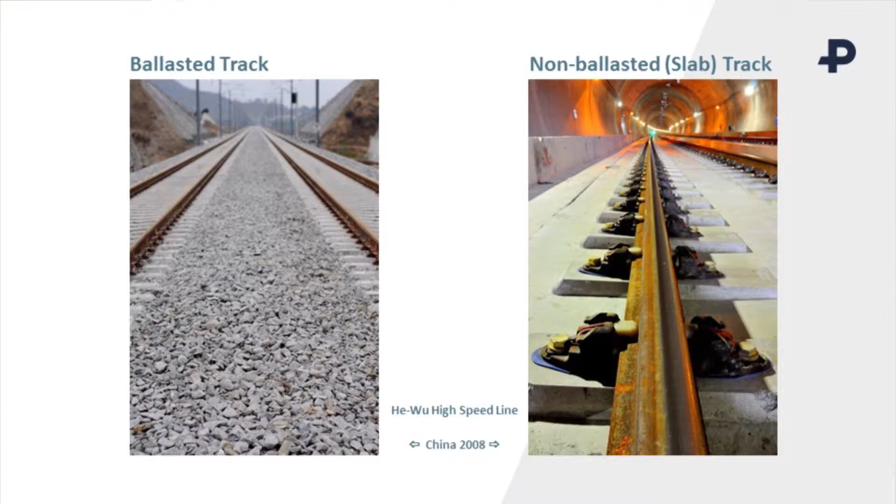There's a couple of pictures here, one of ballasted track, one of non-ballasted track, just by way of introduction. Those pictures are actually taken only a few hundred metres apart, and they show that you can use either on the same project. The particular point I wanted to make here wasn't why you'd choose one or the other, though you might get a hint from the fact that one's in a tunnel and one isn't. But the thing is, if you take away the ballast from the system, you lose a number of aspects of the performance of the system.

One is a degree of resilience, which the ballast provides. Another one is some drainage. And the third one would be the capacity to make adjustments to the line and level by tamping the track.

So the way that you overcome those losses, at least one way of doing that, is by providing that capability in the fastening system, which tends to mean you have a slightly more complicated fastening system than on ballasted track, typically a baseplate arrangement. So if you were to look on our website, a bit of advertising there, you'd find that we supply quite a few different designs of baseplate.

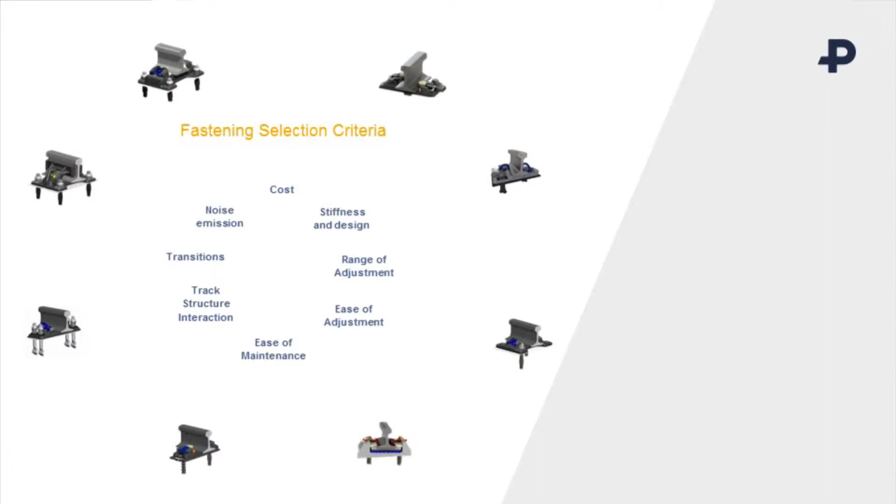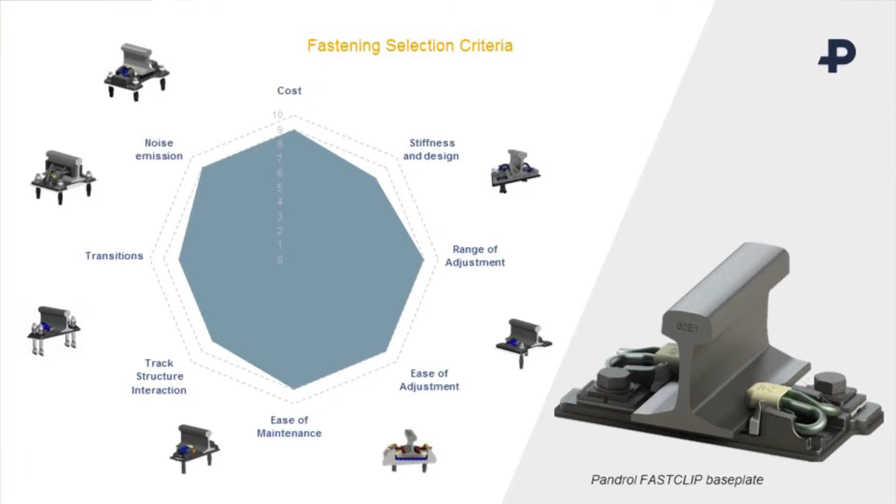So why would you choose one over the other? Probably a good way of looking at this is to look at the kind of things that are important to you as a user, or our customers. These are the kind of things we get asked questions about. So what you might then do is look at your own particular project and assess how any given baseplate performs in relation to those different criteria.

What I particularly want to do, though, is focus on just one design of baseplate, because it's a good all-rounder. It actually performs quite well in relation to all those aspects, so it provides quite a good framework for talking about all of them. So what I basically want to do is work my way through that list and talk a little bit about each aspect of the performance of the baseplate. And I'll either reach the end, or I'll get shown the red card if I carry on too long and we won't reach the end. But hopefully we'll get there.

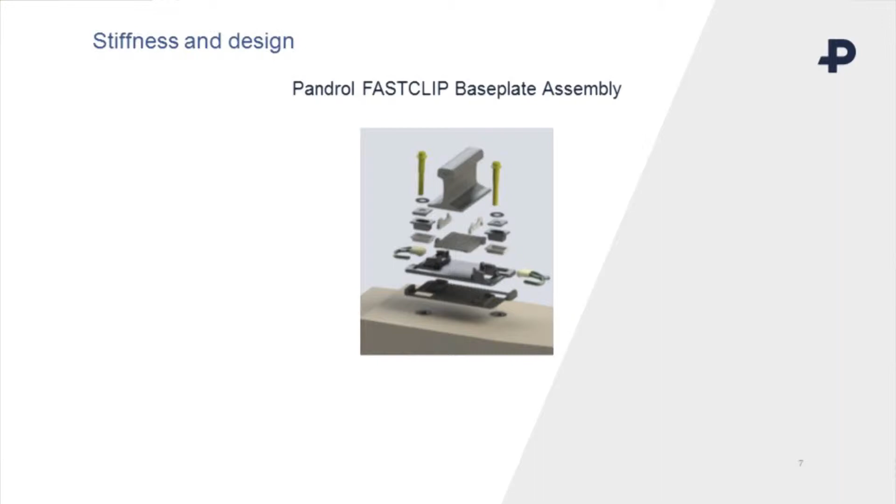So if I start off by talking about the stiffness and design, a baseplate like this is clearly made up of a large number of components, but from the end user point of view, you don't really have to concern yourself with that, because most of it is pre-assembled into one unit with some anchor bolts to fix it down. So you can treat it as one unit.

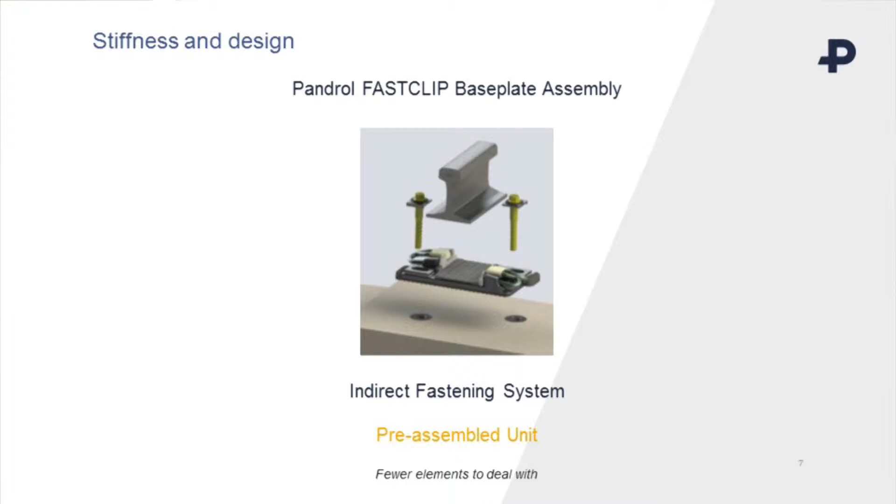From the technical point of view, that's defined as an indirect fastening system. The reason for that is that the means of fixing the rail to the baseplate, and the baseplate to the slab, are separate and independent from each other. So there are two different mechanisms there. Other aspects of this kind of design: the rail is mechanically and electrically isolated from the baseplate, and the baseplate is the same to the slab.

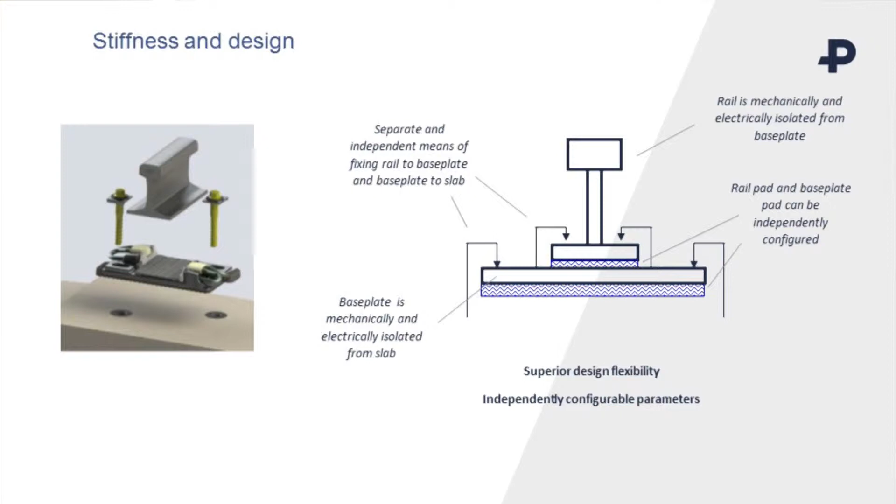And then you've got two pads in series which can be independently configured. So overall, that gives you quite a lot of flexibility in exactly how you configure this kind of system to meet any given requirement. So, you have to watch this quite carefully and quickly, but these are the key aspects of the system: the base plate and the anchor, the fastening of the rail to the base plate, and then you've got two pads in series. So that's what we're looking at.

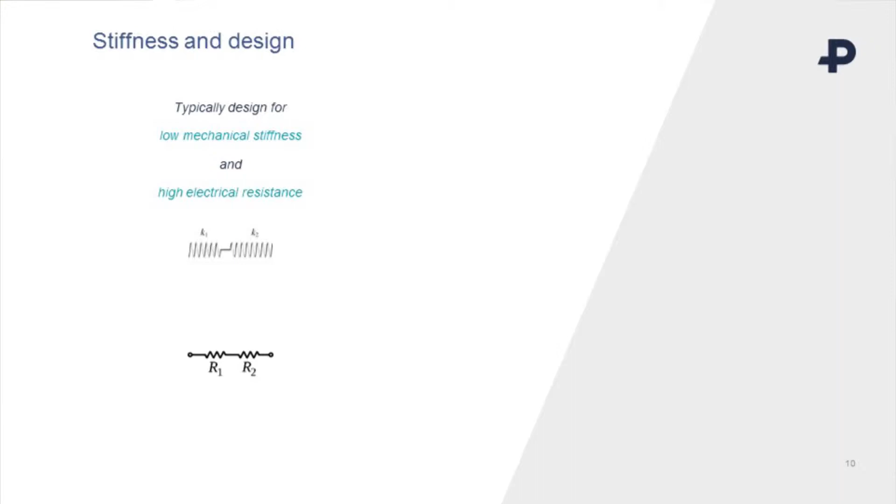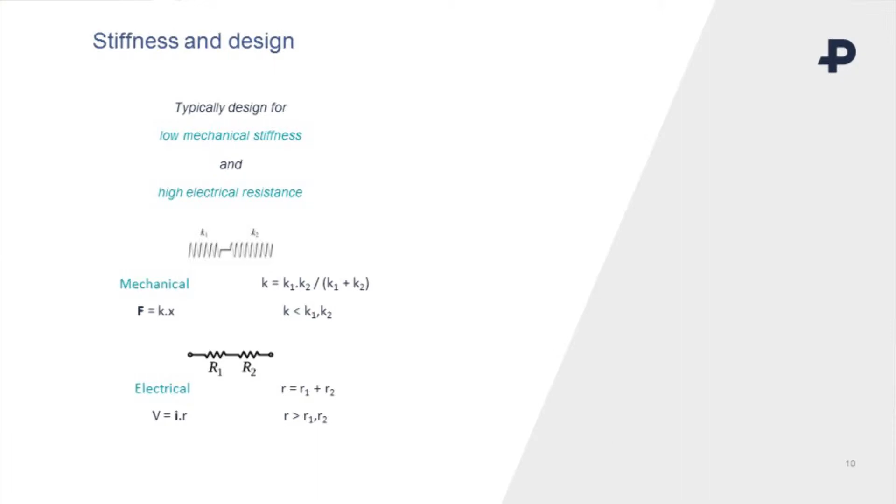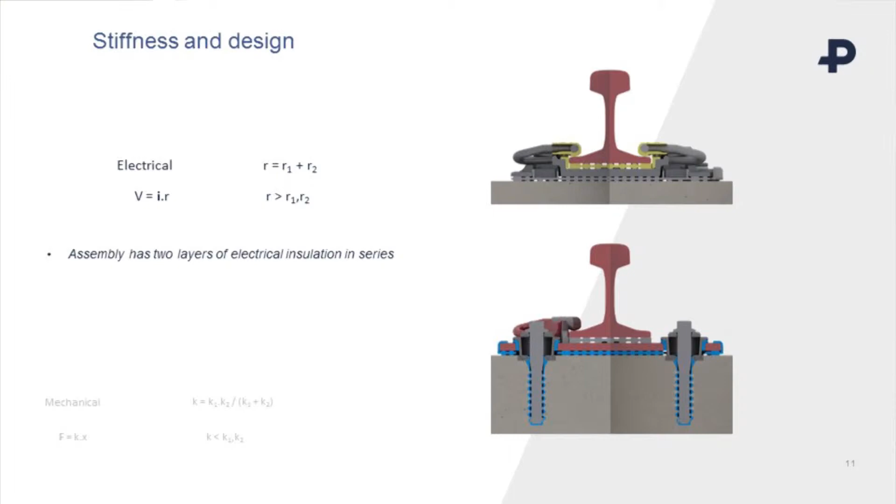Now, typically, you'd be looking to design for low mechanical stiffness and high electrical resistance, with two elements in series - looks kind of similar, and in fact the equations that govern those systems are pretty similar. But the thing to notice here is if you apply a force to the rail, it will be transmitted through the base plate into the slab, so it's the force that goes through the whole system. If you apply an electromotive force, i.e. a voltage, to the rail, it's actually the current that goes through the whole system. So if you look at the equations for those two things in series, quite neatly, two springs in series give you a lower mechanical stiffness than either one, whereas two resistors in series give you a higher resistance than either one, which is what you really want to achieve.

So if we look at the simple case of electrical resistance, you've got two layers, one on top of the other.

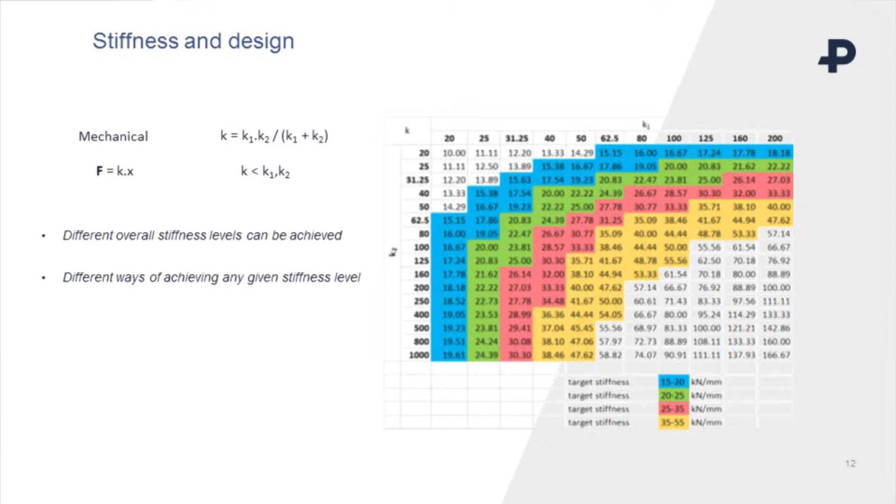You've got two levels of resistance for current to get through. If you look at the mechanical aspect, the key thing to notice is that you can achieve all sorts of different levels of stiffness by choosing appropriate pads. As represented by the different colours, you can choose different overall stiffness levels. But also for any given stiffness level, you can achieve that in many different ways by different combinations of pads. That's something I'll come back to later because it's a useful aspect of the system.

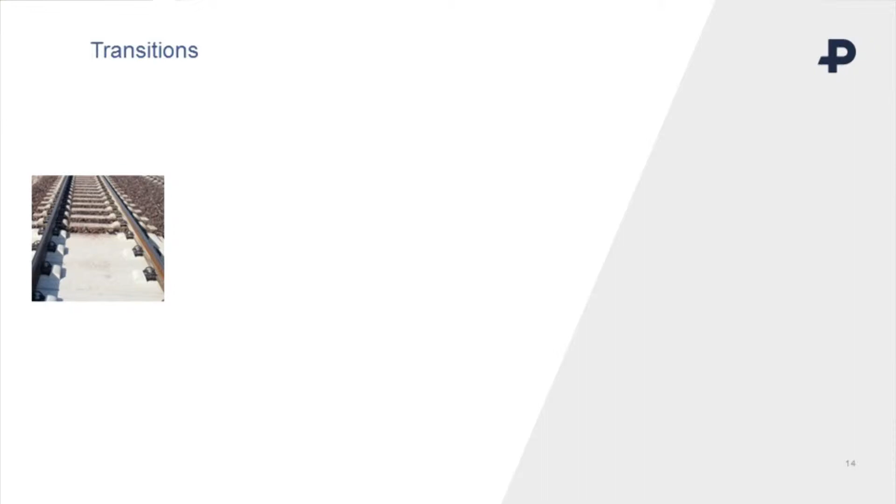So how do you then use these kinds of systems? If we look at transitions, there's a picture of a transition between slab and ballast, and actually not very much has been done there - you go straight from one to the other. There's an extract from a paper from about 20 years ago pointing out why that kind of arrangement might lead to problems. On the left-hand side you've got relatively soft track with a large deflection bowl.

As you move towards the right-hand side, the track stiffens, and that gives rise to dynamic forces as you transition. That can then lead to settlement, and you can get into a kind of spiral of deterioration - the worse the settlement, the bigger the dynamic forces, the worse it settles. So to overcome that kind of problem, you might want to design some kind of smoother transition between one type of track and the other.

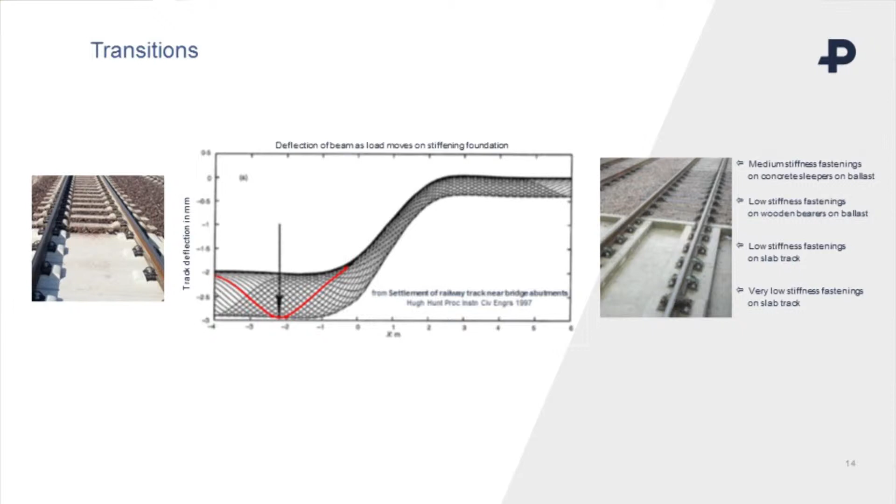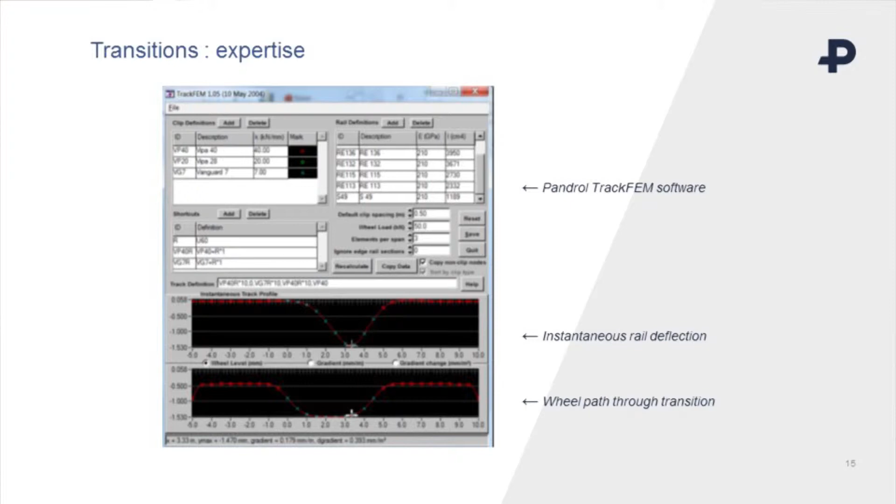The way we approach doing that is to use our own bit of internal finite element software, which allows us to configure different configurations of base plates, spacing, and rail sections. You can see the top trace looks like the deflection bowl from the previous slide, and the bottom trace shows how that deflection bowl changes as you move along the track. So in fact there we're going from stiff track to soft track and back to stiff track again.

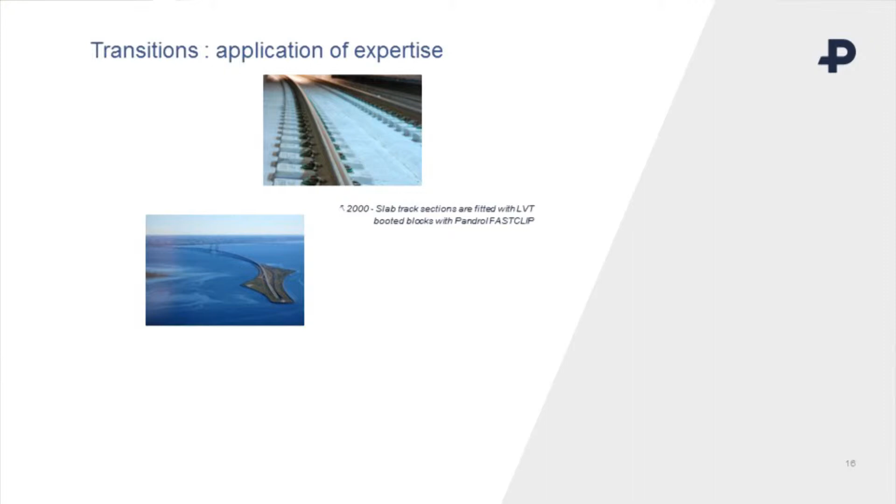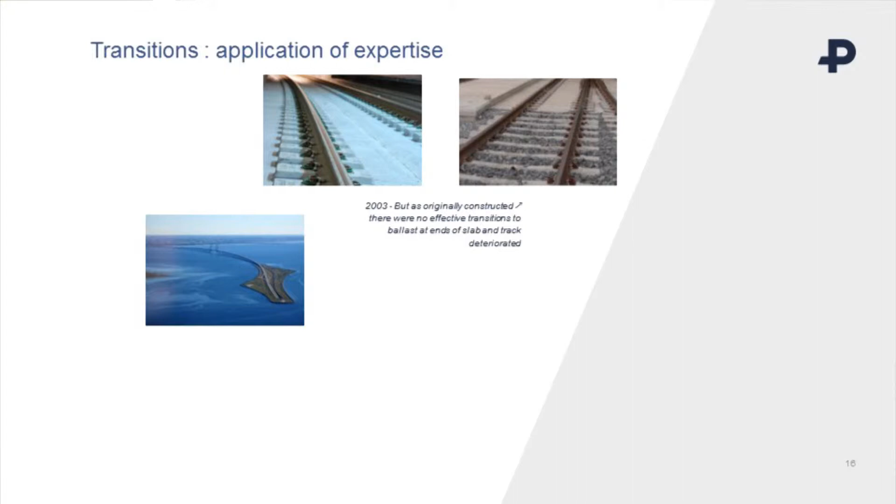So if we look at an example of how that's been put into practice, this is an example from the Øresund link between Sweden and Denmark, which was actually built nearly 20 years ago now. There were sections which were slab track with booted blocks in it, and other sections which were ballasted track. There's a story that the border between Sweden and Denmark exactly corresponds to the difference between the slab - I don't know if that's true, but at any rate, it did create a problem.

So after 3 or 4 years, the system was not working very well. It was deteriorating quite quickly, and you were getting that settlement. We were asked to see if we could help propose a solution.

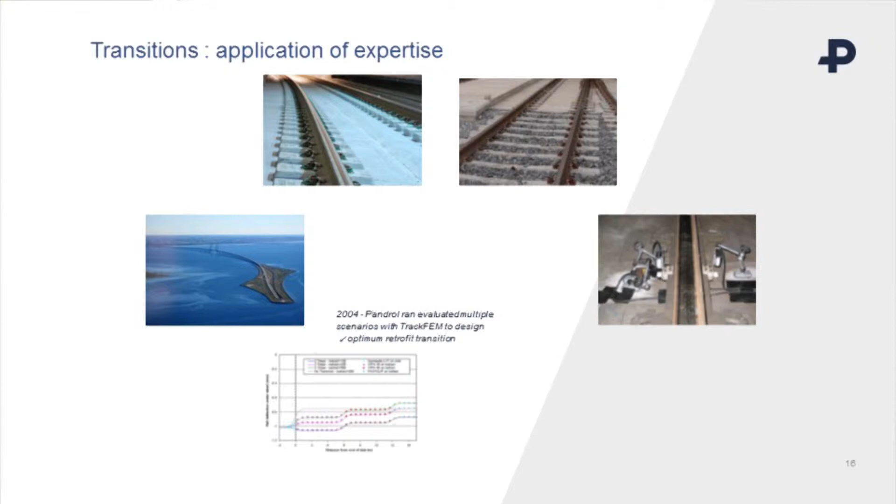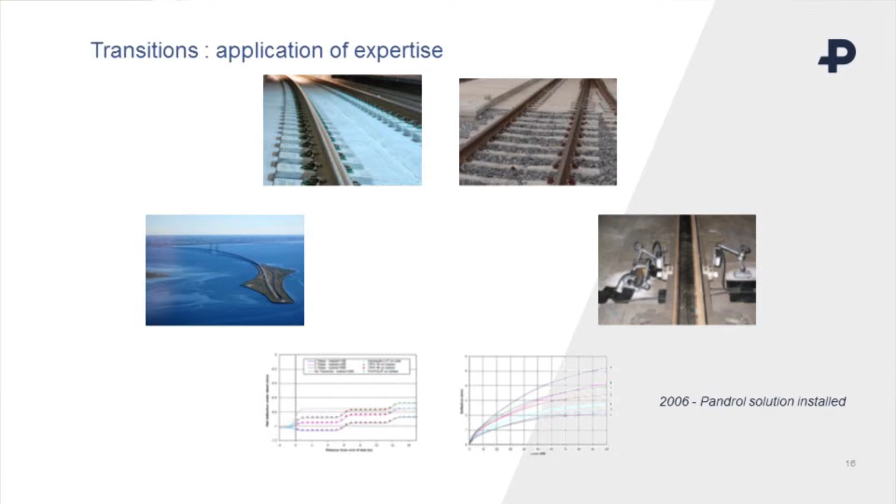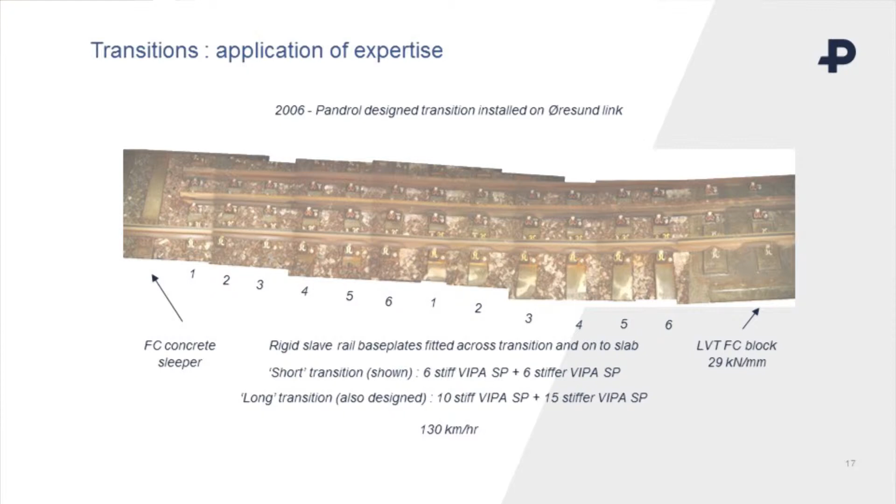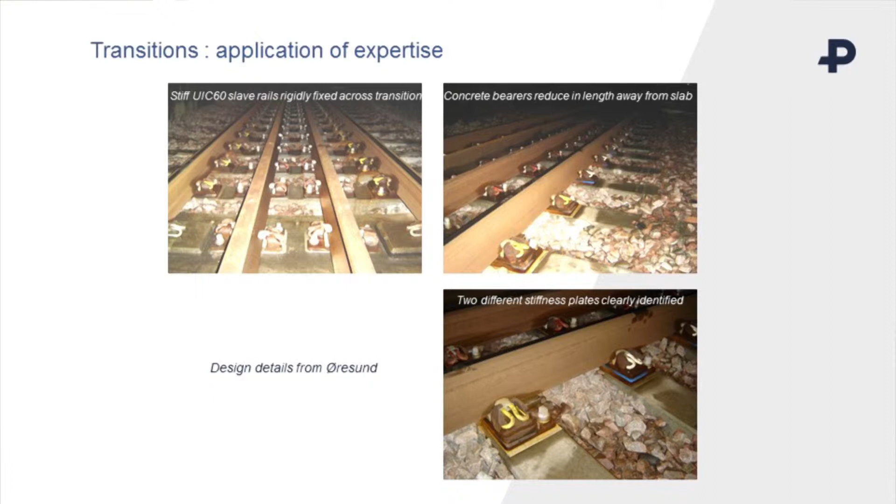A few pictures of details of that arrangement. One of the key things with this kind of thing is to make sure that it's clearly identified what is supposed to be where. You've got to think about the scenario when in a few years' time somebody takes the whole lot apart and has no idea how to put it back together again. So what we've done here is colour code all the elements so there's some clarity about what is supposed to go where.

Taking that further forward, the LGV Est line in France, the high-speed line, was mainly based on ballasted track, but there are a few sections of slab track there. There was a deliberate design for transitions between slab and ballast, but it didn't work very well.

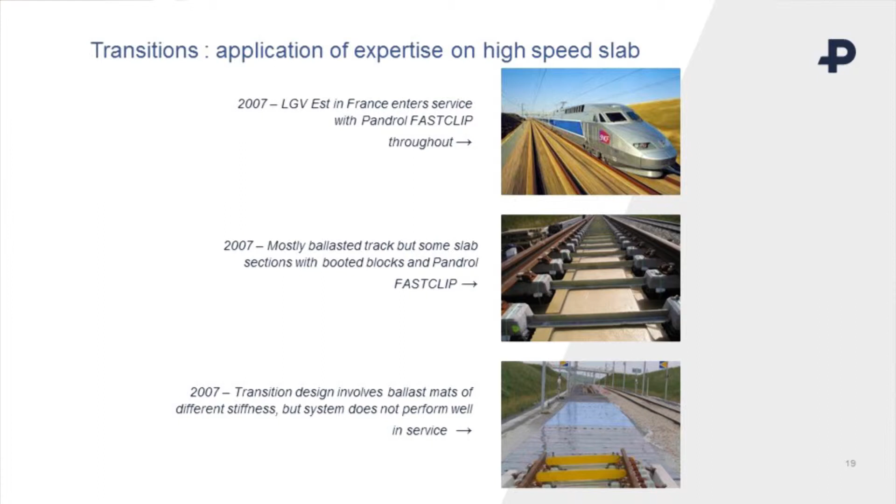A couple of years later, SNCF started talking to us again about what could be done to improve the situation. We explained what we'd done on the Øresund link, and they took up that idea, asked us to configure a couple of particular specifications of base plate. That configuration was again installed in the track. That was done about 5 years ago.

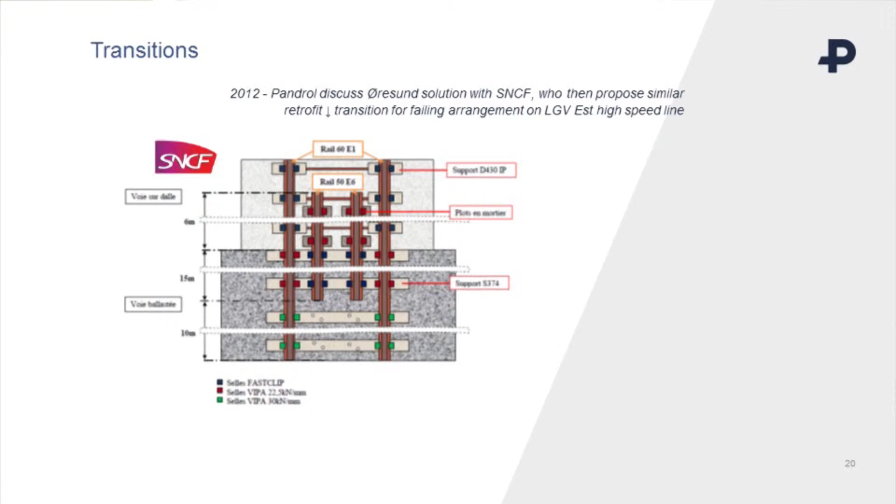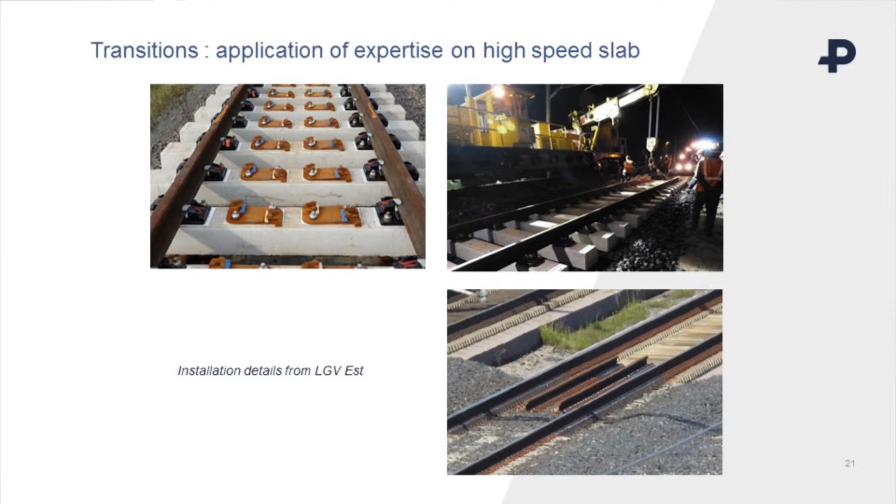So that's on extremely high speed track. A picture in the bottom right-hand corner shows quite a foreshortened view of it. Overall, it's probably about 20 meters long. But that's been in place for about 5 or 6 years now. It's working quite well.

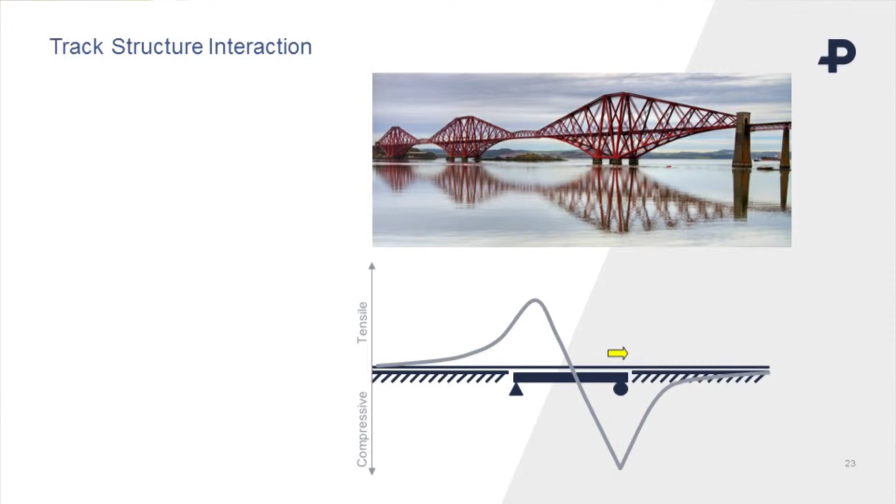Next issue, track structure and interaction. Suppose you've got a really long structure which can expand and contract, but you've got a continuous rail running over the top of it. That's going to give rise to problems because the expansion and contraction of the structure is going to reflect in the rail and induce stress in it. One answer would be to put a joint in the rail as well, but you really want to avoid doing that if you possibly can, because it generates more maintenance issues.

Looking at a couple of extremes, and these are kind of ludicrous extremes, if you were to weld the rail to the bridge deck and the abutment, you would focus all that expansion and contraction on just one span. So that wouldn't be a very good idea. You get a huge amount of expansion and contraction in just one span.

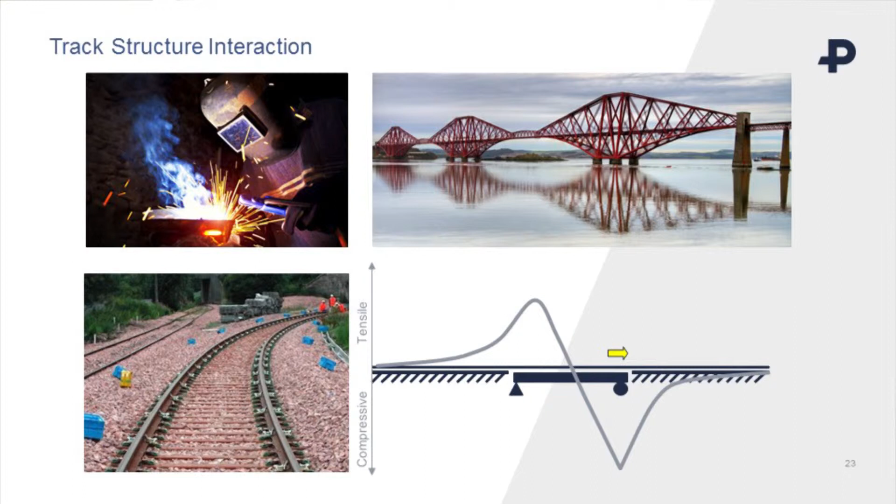If you did the other extreme and mounted the whole thing on a resilient, longitudinally slippy fastening - this is an arrangement we've got for de-stressing, so you can raise the rail up - there's no resistance at all. The problem there would be what happens if the rail breaks in cold weather: it's going to pull a long way apart. So you don't want to do either of those things. You want to do something in between.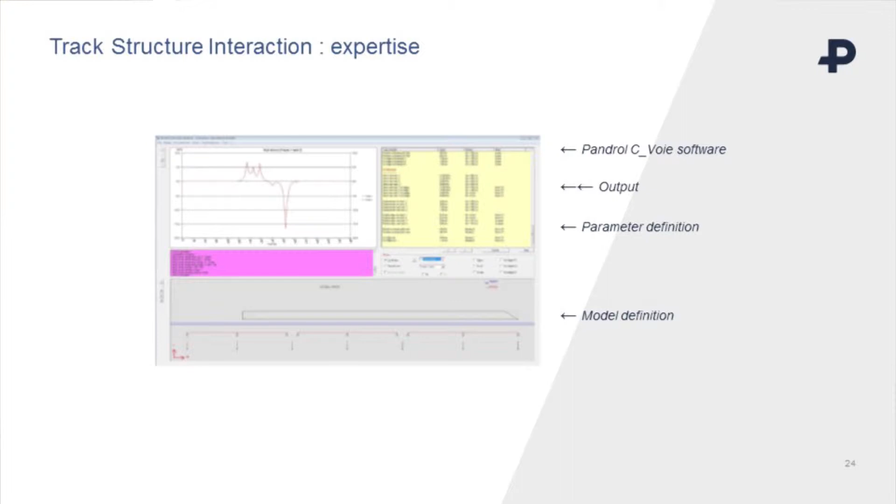To understand exactly what's needed in between, you would probably look at some kind of model of the system. This is the one we use. You can set up different models of the track, the vehicles, the temperature gradient, and look at different situations where the train is on the bridge, working out the biggest stresses.

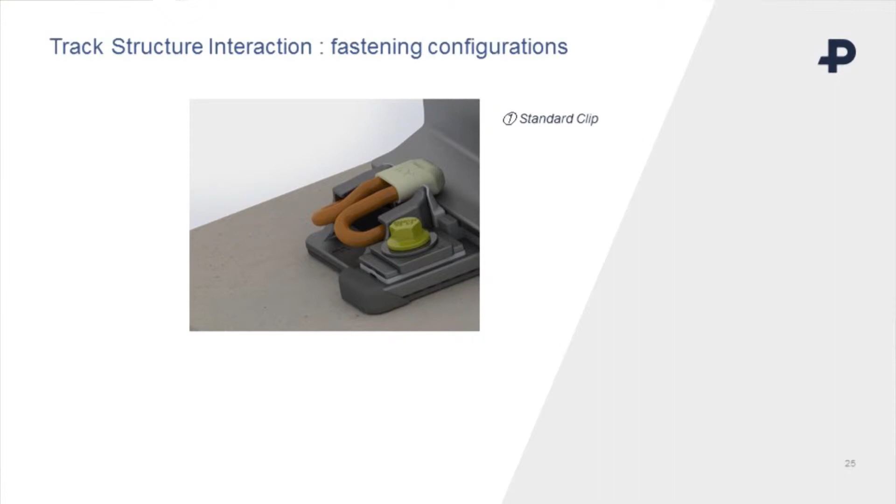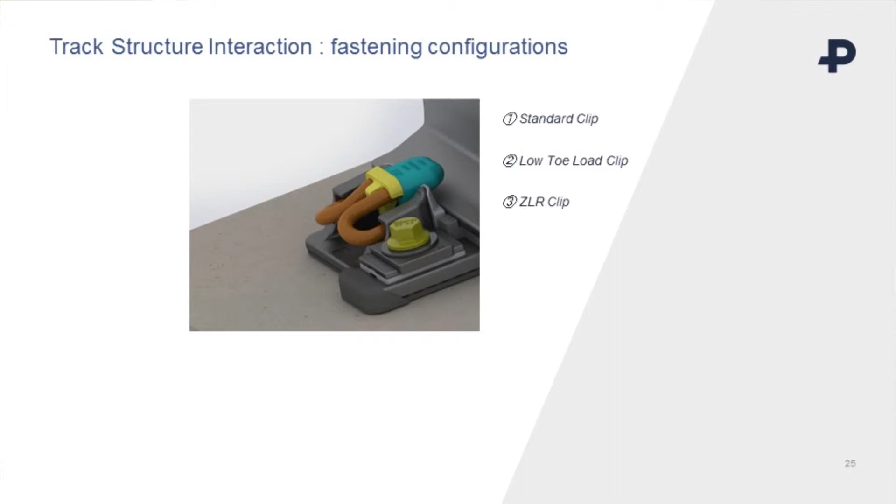The other aspect to addressing this kind of problem is actually having something to do at the end of it - how are you actually going to fix the problem? What we've got here is a standard configuration of the base plate into which you can swap a low toe load clip, so that gives you less resistance, or a step further, a clip with no toe load at all. It's not actually acting on the rail, so you get no resistance at all. You can still maintain the track.

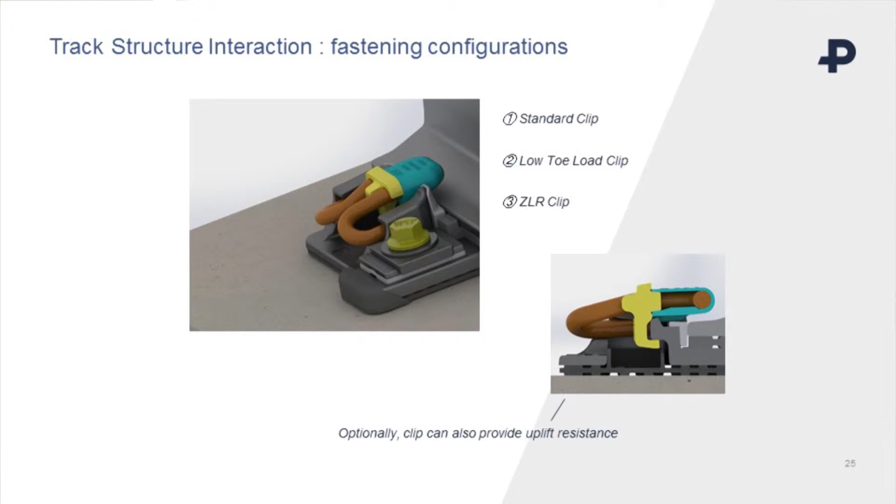You can also configure that to provide uplift resistance. At the end of structures, where you typically get these problems, you may also get rotation of the bridge and the rail, so you want a bit of resistance there. Those kinds of modifications to the basic system can be applied.

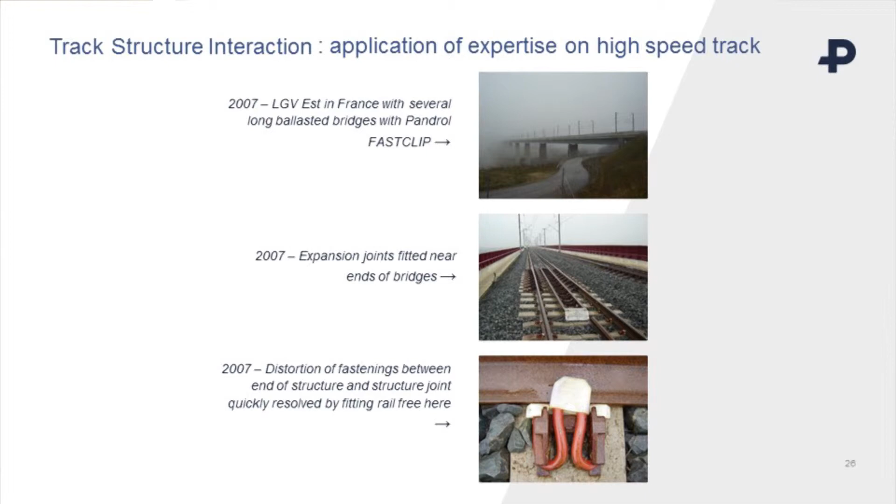Here's another example, again from the LGV Est in France. The middle picture shows that in this instance, this structure is so long that they've had to put an expansion joint into the rail, but that wasn't coincident with the structure joint. So there's a short piece of track where the rail's moving but the bridge isn't, and you can see the effect that's had on the toe insulator of the clip there. It's a relatively minor problem, but we can eliminate that by putting zero toe load clips over that short length of track.

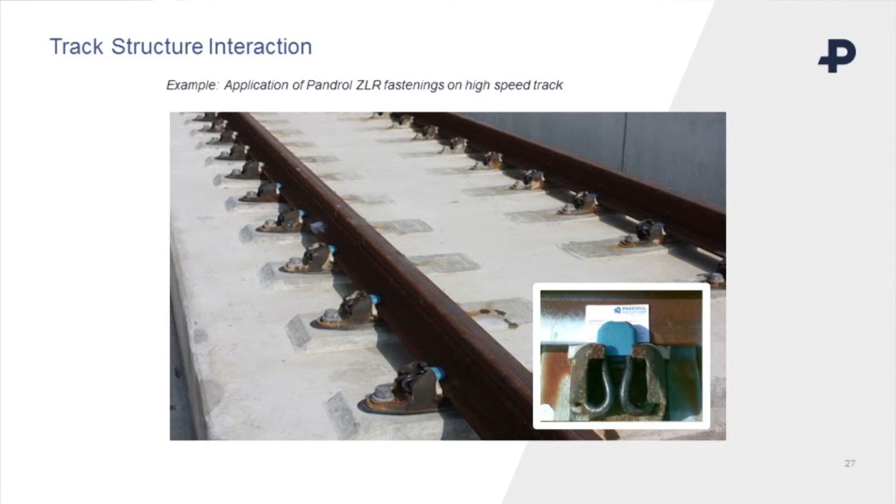Another picture here, from a high-speed line in Korea. There's an inset picture showing my colleague has slipped his business card under the toe just to show there's no contact there at all. If you've got very good eyesight, you can probably just about make out that in the foreground you've got blue toe insulators, so those are zero resistance, while further away you've got white toe insulators with full toe load. So you can tell from that picture that you're standing somewhere near the joint and looking away from it.

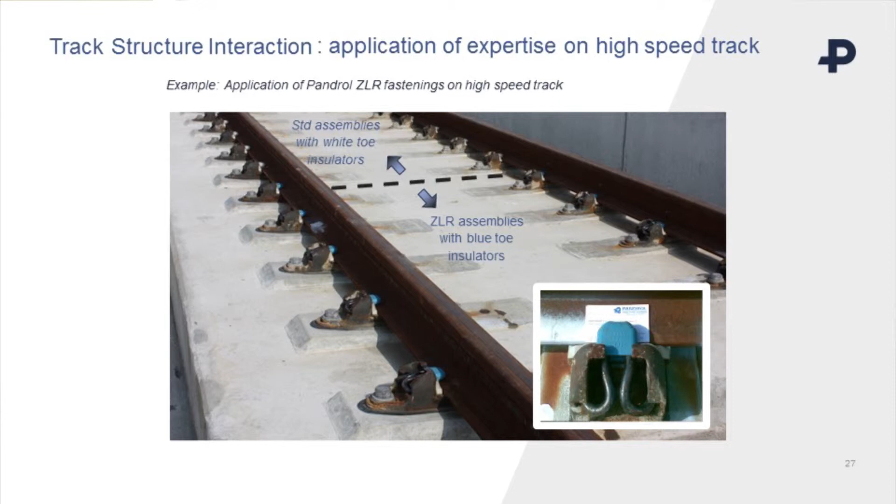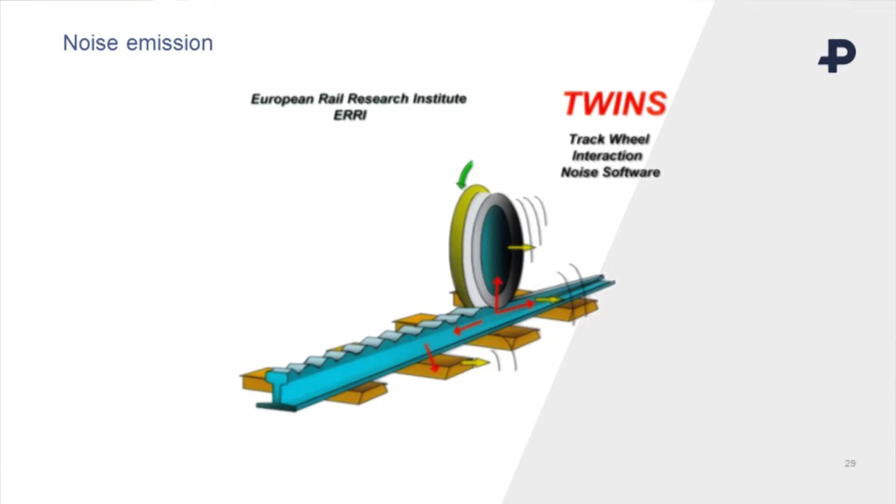Next issue, noise. It's a complicated subject, so forgive a very brief and superficial explanation. Fundamentally, it's quite a good thing to have soft fasteners immediately under the wheel. It reduces the amount of transmitted vibration and reduces wheel-rail contact forces. But further away from the wheel, it's quite a bad thing to have a low stiffness fastener, because it means more transmission of vibration along the rail. So you've got a basic conflict of interest there, and what can you do about it?

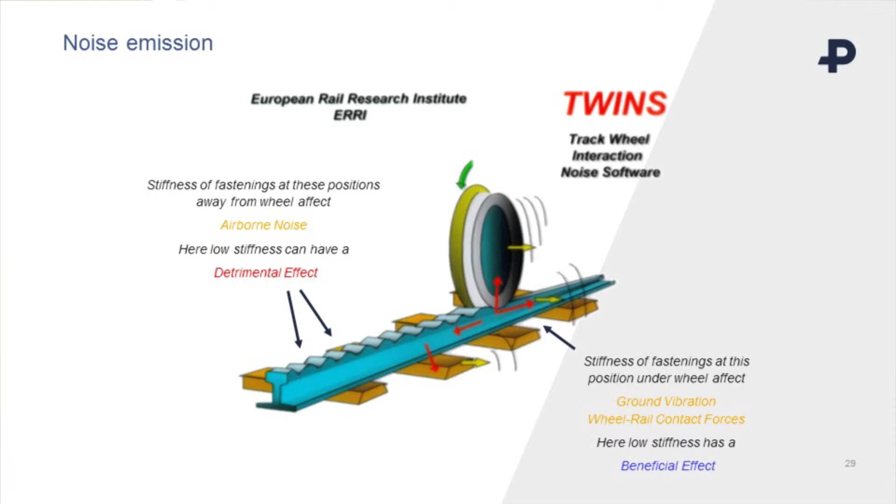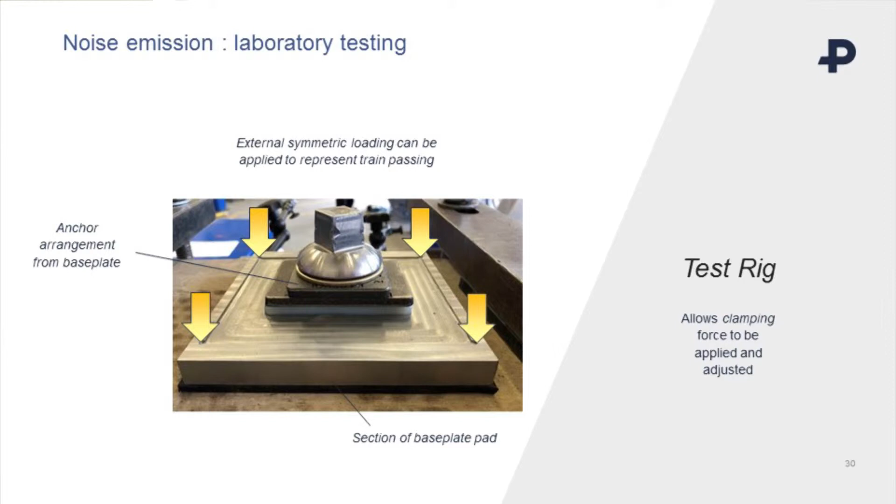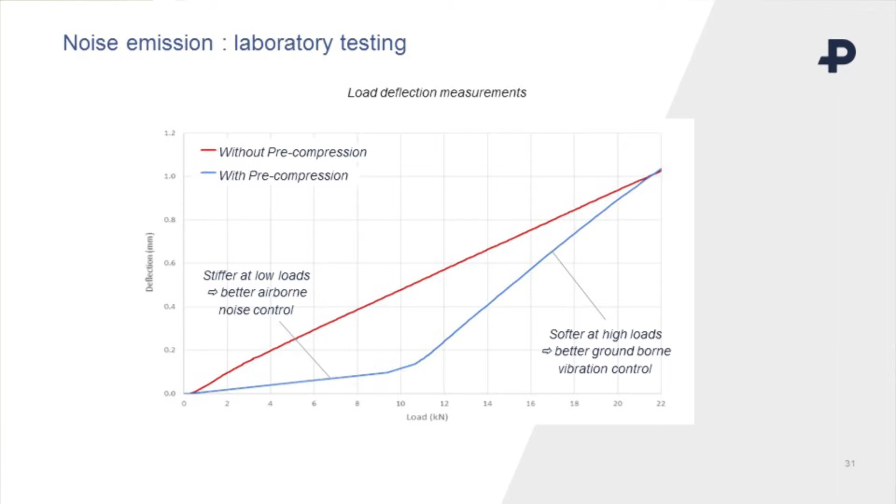Well, this is a neat idea, which we didn't invent, but we did realise it worked quite well in this kind of system. So we've got a test rig here, basically a small part of one of these base plates with the anchor mechanism. We can set that up and apply an external load to it. What you find is the external load gradually replaces pre-compression supplied by the anchor system, so you don't get a big change in deflection despite applying a large load, which translates to being a high stiffness. If we compare a couple of configurations, one with pre-compression, one without, you can see that adding pre-compression to the pad makes it behave as though it's stiff at low loads and soft at high loads, which is exactly what you're trying to achieve to get a good combination of vibration transmission mitigation under the wheel and lower noise away from the wheels.

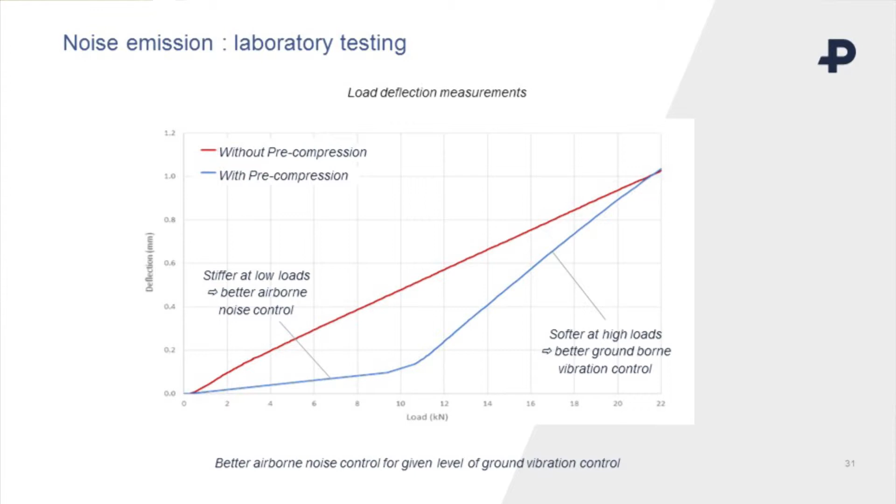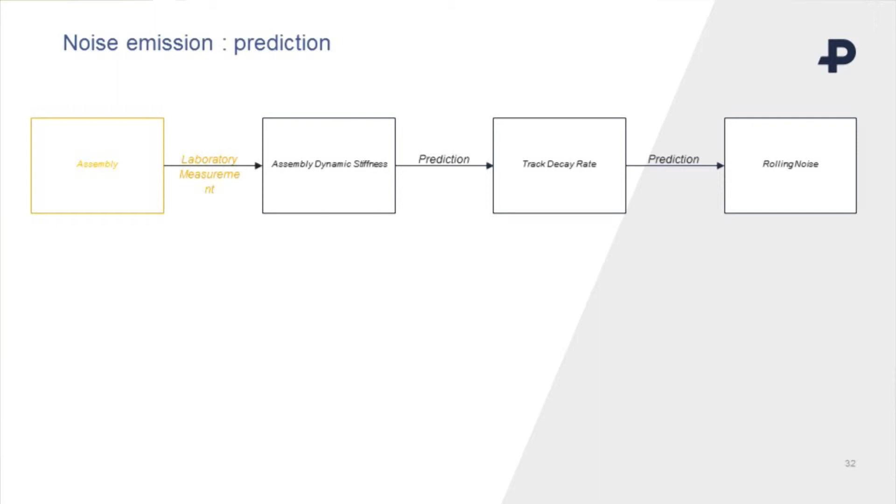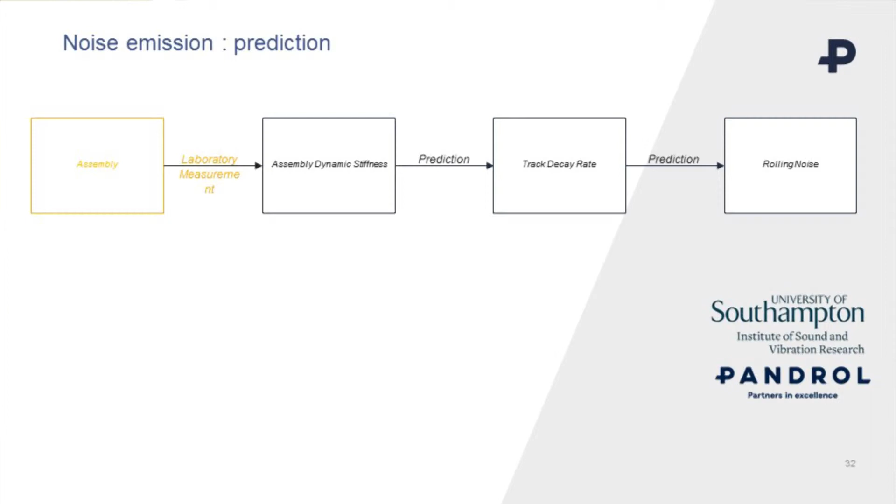To figure out if that actually works in practice, you need to do some laboratory measurements and some predictions. That's all quite specialised knowledge, so we've been working with ISVR in Southampton on that. The first step is to measure in their dynamic test rig the characteristics of the assemblies. If you're used to looking at plots like this, you'd probably assume that's frequency along the bottom, but in this instance it's load. The blue line represents an assembly that is getting a little bit softer as you put more load onto it, which is what we're looking for in this test rig.

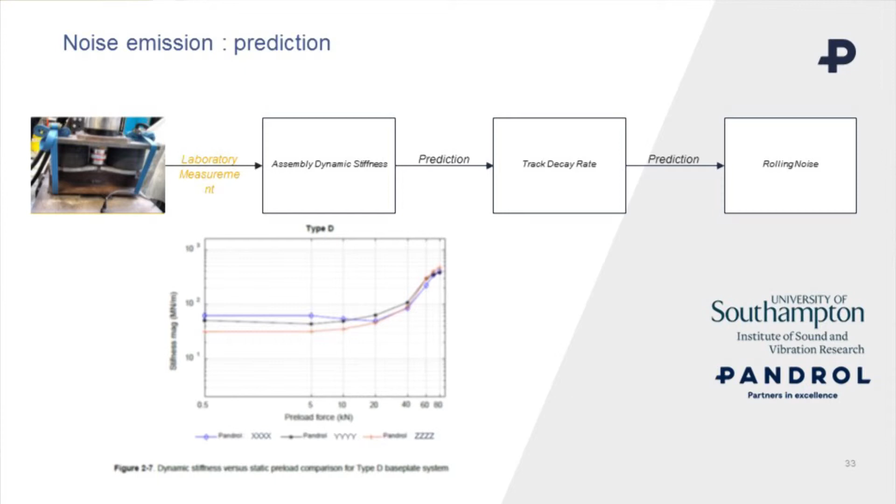The next step would be to make a prediction of the track decay rate, which ISVR can do. But even better than making a prediction would be if you could measure that directly. Normally that's quite difficult on a live railway, because you need to attach all sorts of instruments, spend a lot of time tapping the rail with hammers, and change the configuration to all the arrangements you want to test. But at the High Speed College in Doncaster, there's a fantastic facility - it's even got a nice roof on it to keep you dry. So you can test away to your heart's content, change all the configurations, and confirm that decay rate prediction.

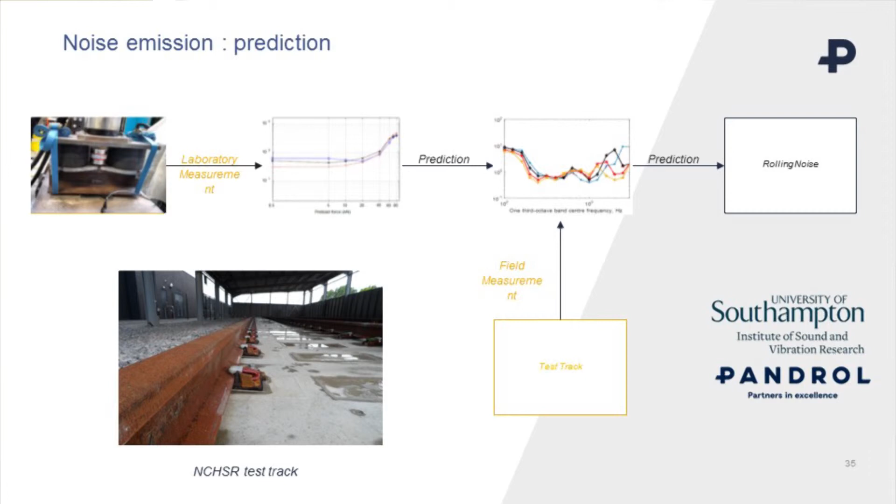And then you can make a noise prediction from that. What that shows is that you're predicting different noise levels for 4 different configurations of the assembly. Now, I've seen graphs like that before, but the special thing about this one is that they've all got the same stiffness. So you're changing the noise level despite having the same stiffness in all those configurations, which is kind of neat.

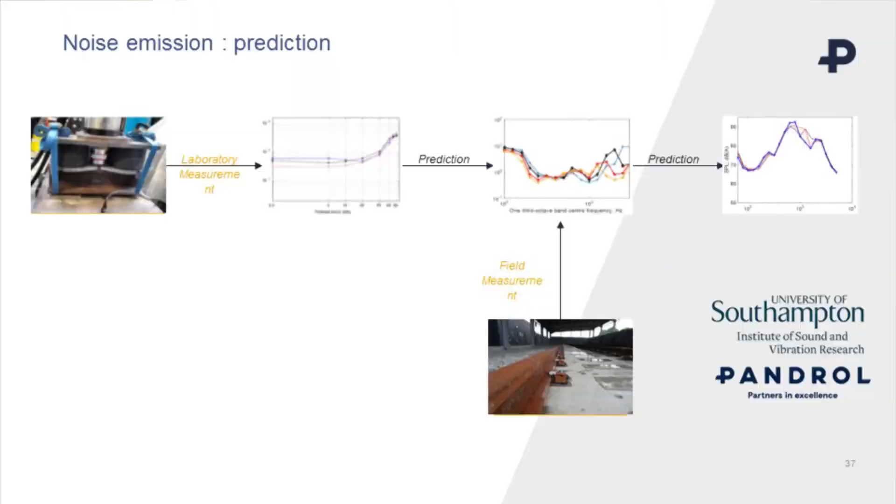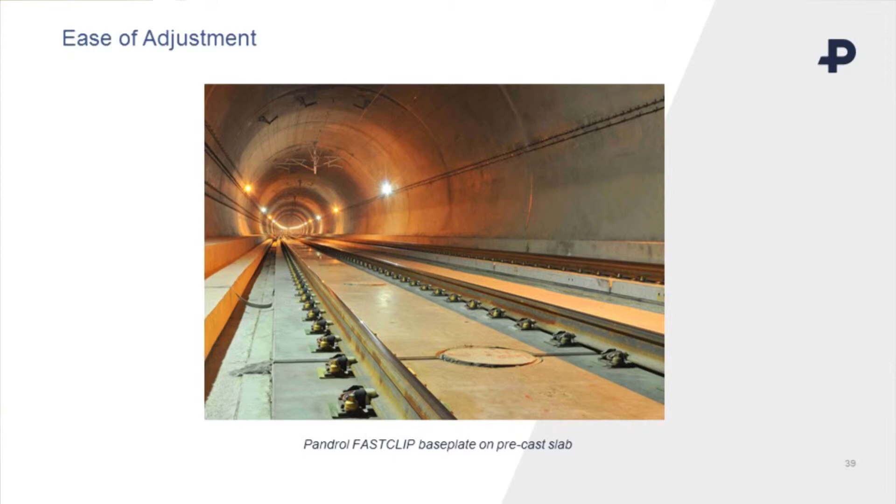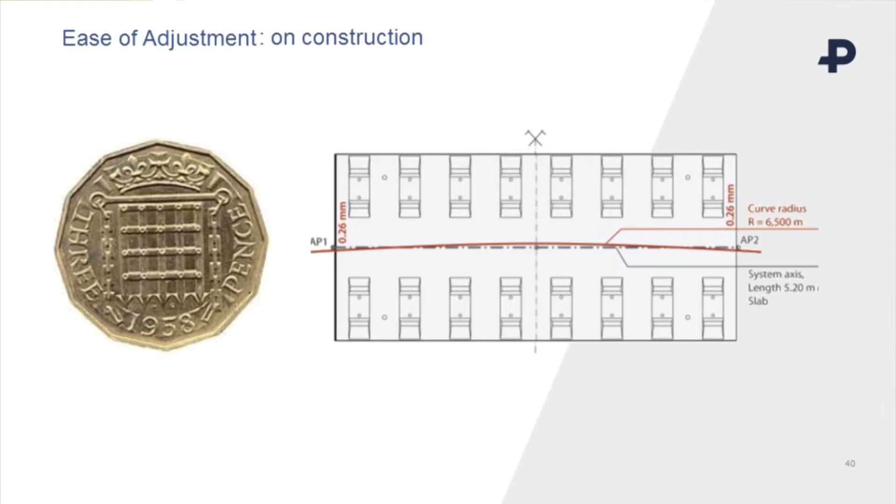Next up, ease of adjustment. So here's that picture of slab track again. You can see it's built, in this case, from 5-meter slab panels. That's all great on a straight piece of track, but if you go around a curve, you're going to get what the older members of the audience will recognise as a threepenny bit problem. You're going to have to offset the base plates on each slab to produce a perfect curve. Actually there's a bit more to it than that, because you really want the base plates not to be perpendicular to the slab, but pointing to the middle of the radius. So you want the base plates to be in particular positions and configurations on the slab.

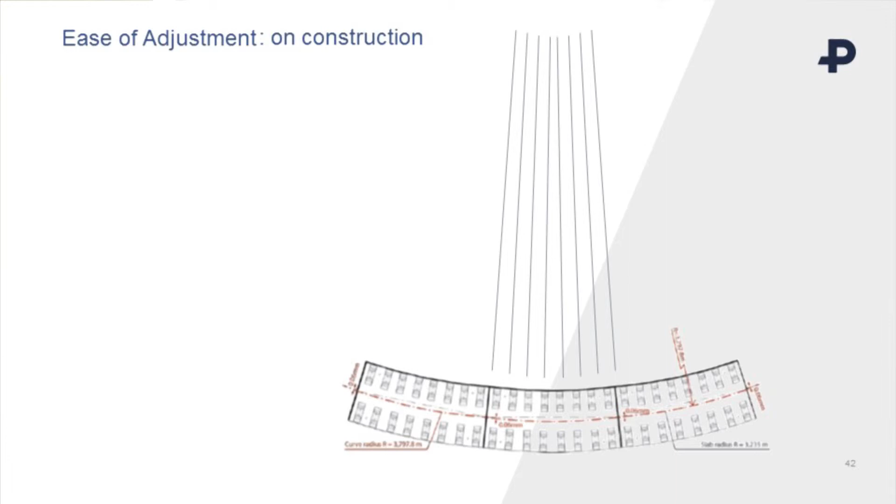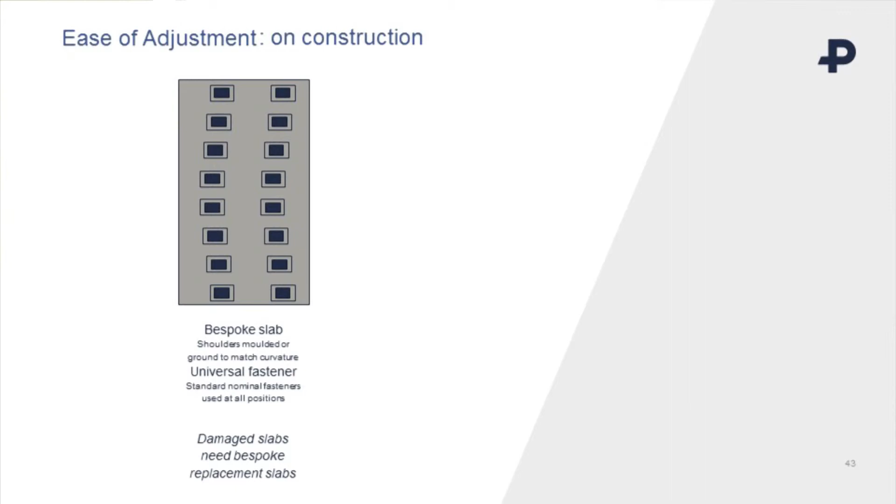There are conventional ways of doing that. One involves making bespoke slabs to which you can then fit universal fasteners. The problem is if you damage a slab, you need to go and make an exact replacement for what you've damaged. You can have a universal slab and make adjustments within the fastening system by changing components, but that's not great because you've created an ongoing maintenance problem. So what we propose is a universal fastener and a universal slab, and you put the fastener in exactly the right position. That's in principle the best solution, but you need a slick means of positioning those base plates in exactly the right places.

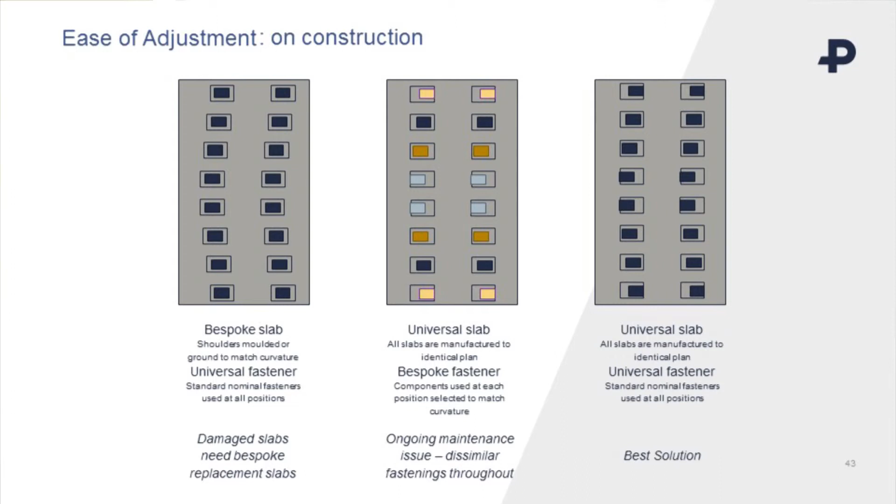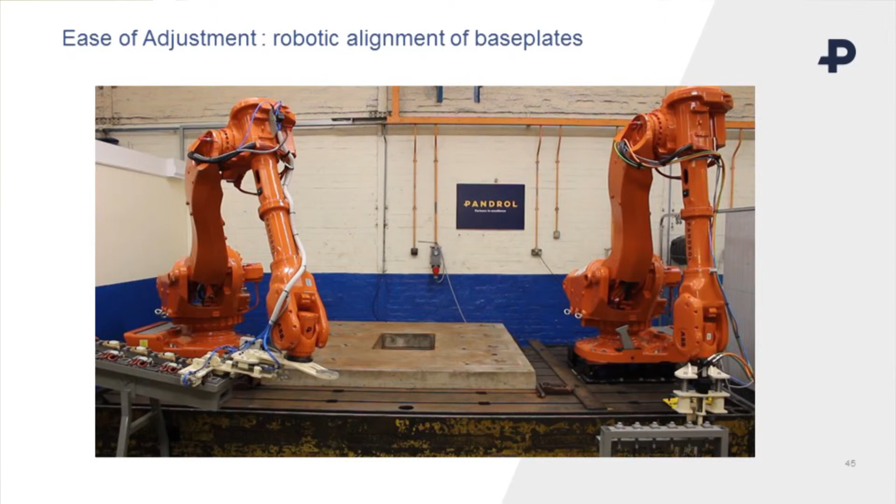We proposed about a year ago that we could do this by borrowing the manufacturing technology we use in our factories for making clips and applying it to this situation. Robots can be programmed to go to exact locations and put the base plates where they need to go. Since then we've been working on that, and we've now got a fairly well-working prototype picking up base plates, putting them on the slab, holding them in exact position until they're bolted down. You can repeat that process, and it will take about 6 minutes to fit all the base plates on one slab.

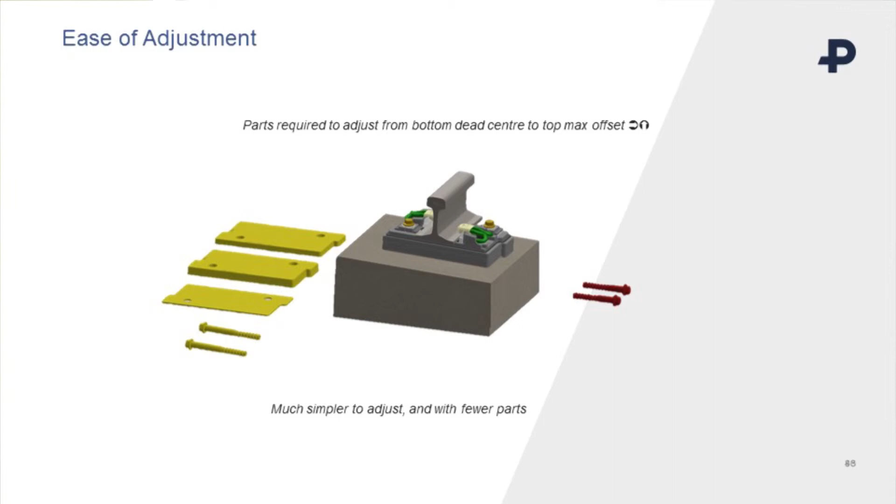You can really only do that because it's quite an easy system to adjust. You don't need to swap out lots of components in order to make positional adjustments. To demonstrate that, we've got a little video clip here. We challenged one of our technicians to do the job of making an adjustment one-handed. He didn't quite manage that, but he did a fairly good job of it. This takes about 40 seconds to run through.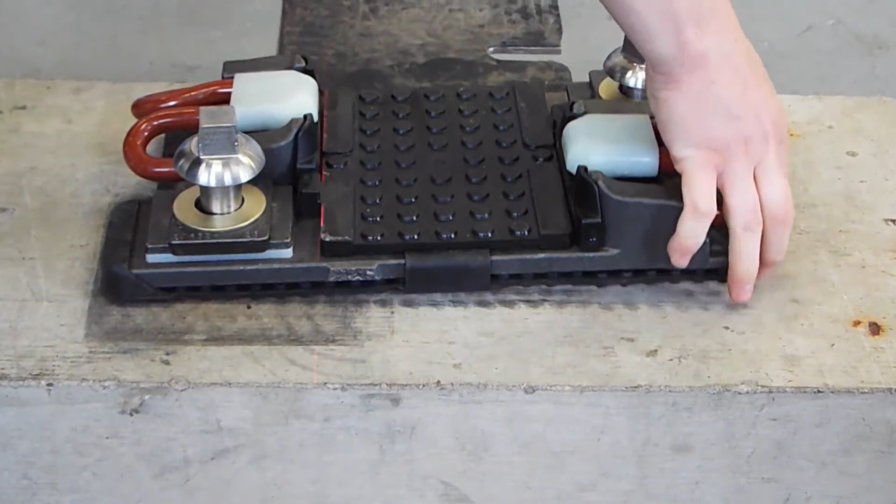Basically what he's doing here is lifting up the base plate by 15 millimeters. What you'll often find is if the slab is inclined, that's going to have an effect on gauge as well. So not only do you need to make a vertical adjustment, you need to make a lateral compensating adjustment as well in order to retain gauge. So he's doing both those things at the same time.

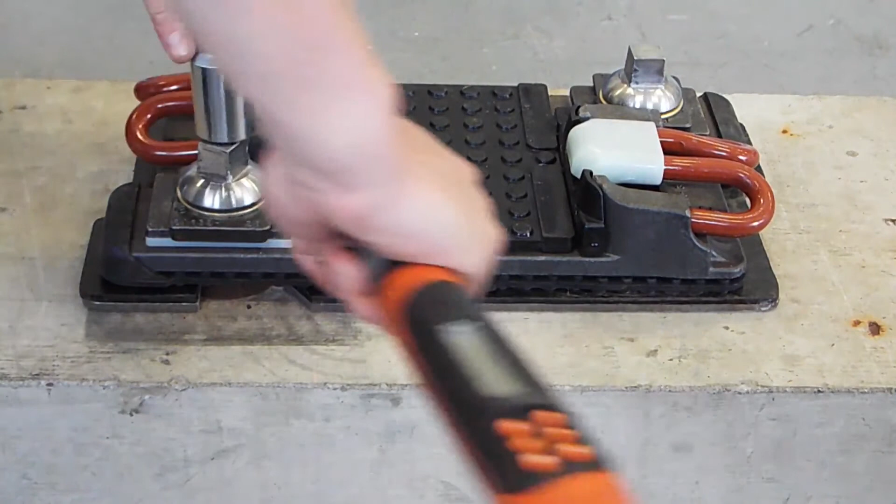And he's almost at the end now. What we've done here is we've put a red laser on the face there, so you can probably just about see that's what he's setting it to.

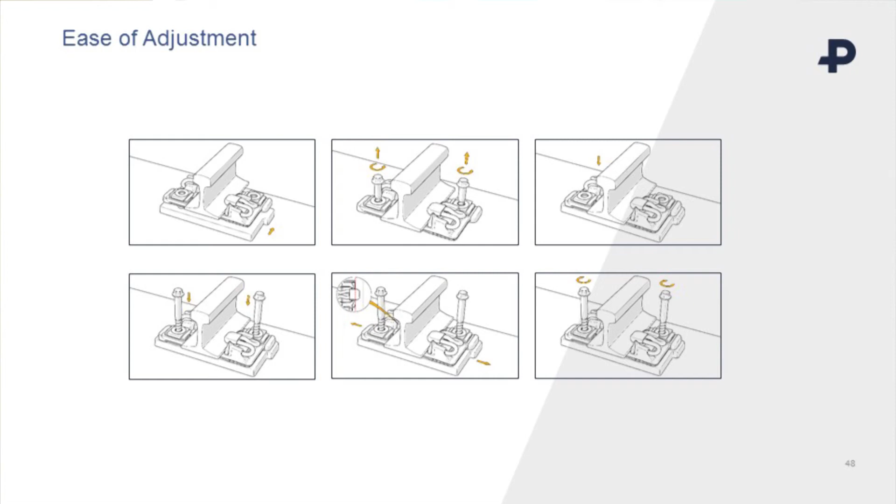Now, you can provide instructions on how to do that. It's fairly simple, but the modern way of doing this kind of thing is probably to encapsulate all that information, so all the information about the product and the way that you maintain it, in BIM files. That's perfectly possible as well. You store that knowledge about how to make adjustments in the BIM file, and that's part of the overall design.

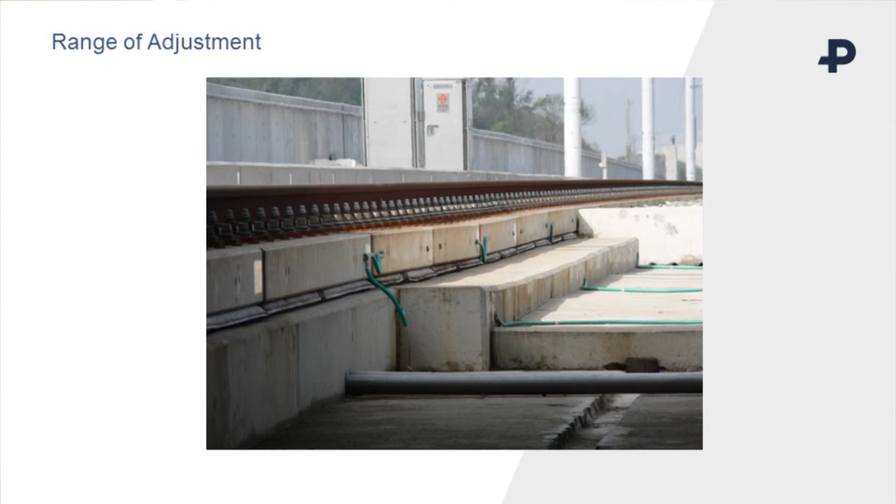If we look at range of adjustment, why would that be important? This is a picture from Taiwan. It's not this particular base plate, but it is a base plate on a high-speed line. What's happened here is there have been some seismic activity, so the track has dropped locally, and it's been adjusted back up. So you can keep the track open, running at full line speed by making that adjustment. To do that, you need quite a large range of adjustment capability. You can provide that with this kind of baseplate system.

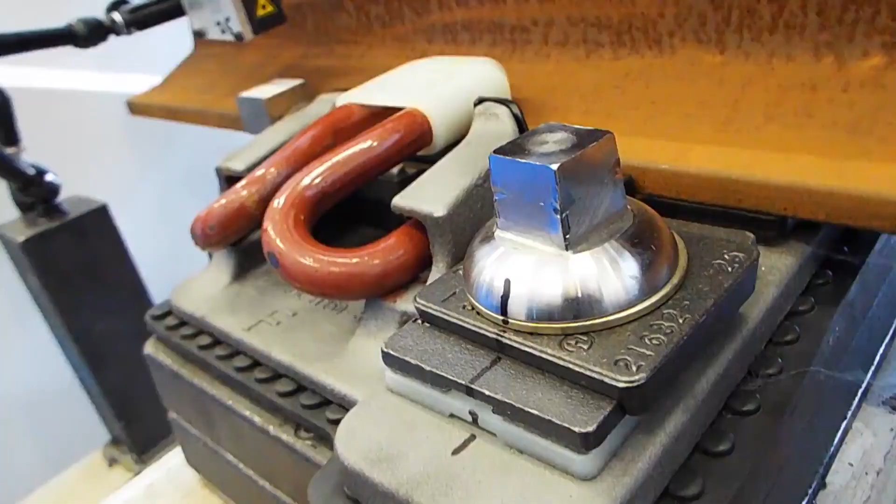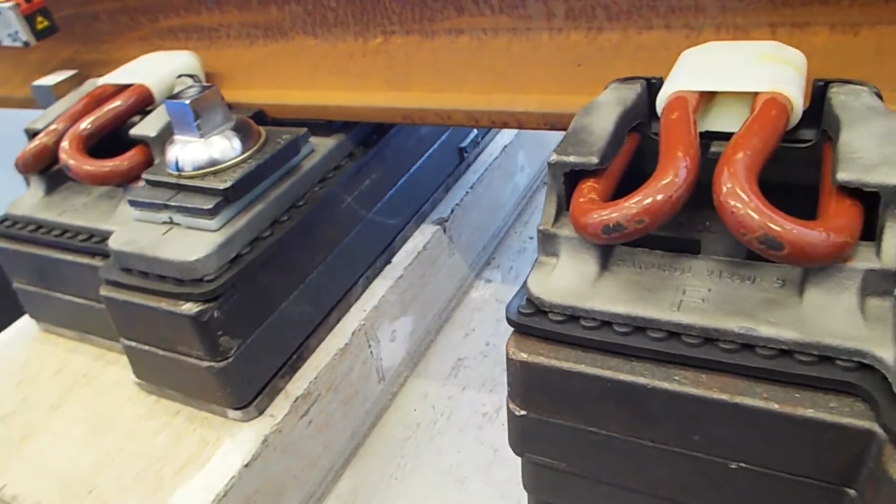What we did is really kind of went to town on this and put 140 millimetres, which is double the amount that we've ever heard specified before, but we thought we'd prove that you could do it. On the left there's a baseplate that's been adjusted upwards by 70 millimetres. On the right, it's been adjusted up by 140 millimetres. We've actually run that for 3 million cycles, a standard European durability test, and it works really well.

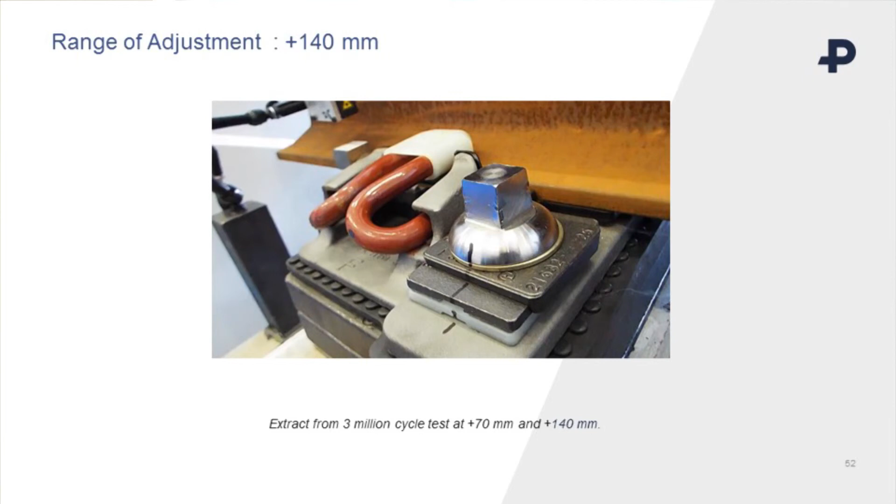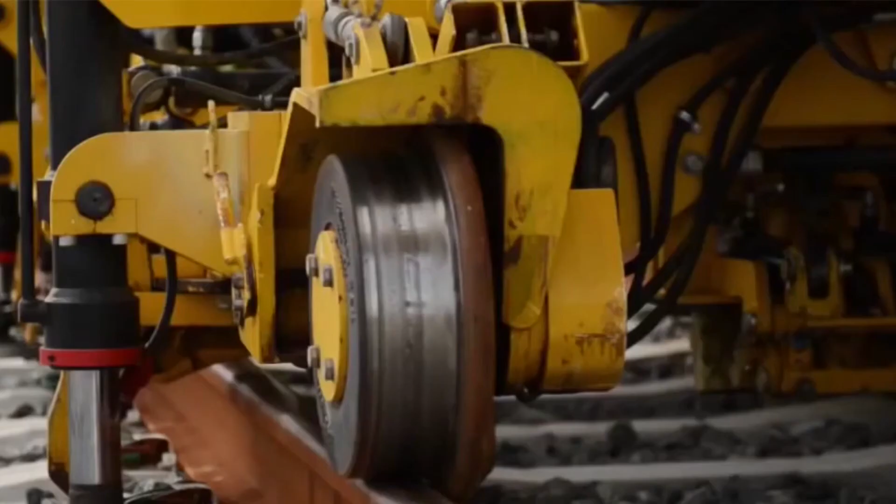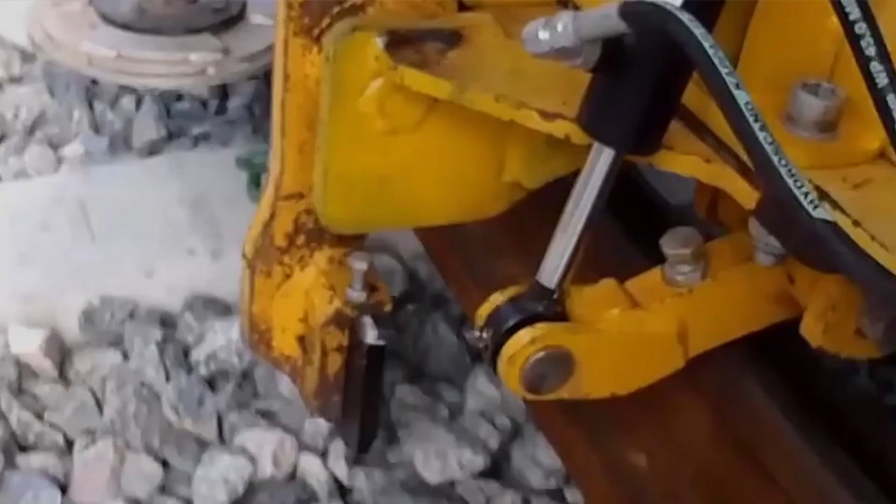Another factor is ease of maintenance. This is, again, something that's important to users. Again, we've got a video clip here just showing the capability of this type of system, that you can apply the clips very quickly. About 70 sleepers a minute is the capacity. And you can take them off as well at a similar sort of speed. So you've got a lot of capability there.

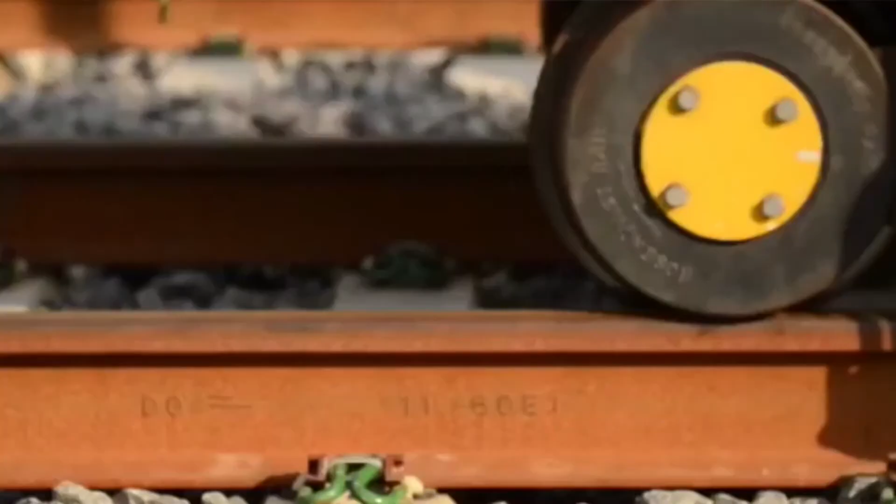I don't have a slick video of it, but you can apply the same kind of technique to base-plated systems on non-ballasted track. This is a machine actually being used to do exactly that. I think this is the Heathrow Terminal 5 extension. Base plates being fitted with a machine of that nature.

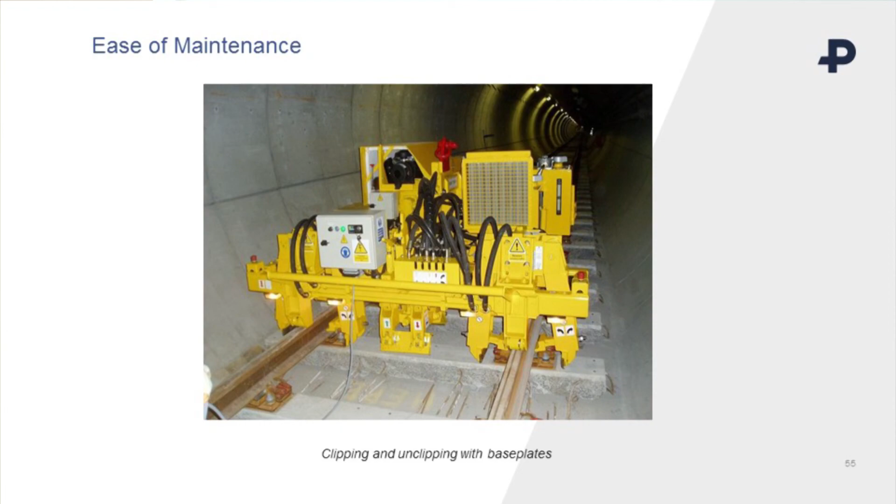Another aspect to it is that you can inspect your track by video. The position of the clip is fairly easy to detect, so you can tell whether it's been installed or backed off just by looking at it. You can do that in principle by running a train down the track at fairly high speeds. You can get up to 200 kilometres an hour and continuously monitor every single fastening. This is some work being done in China on developing a particular configuration of exactly that kind of system.